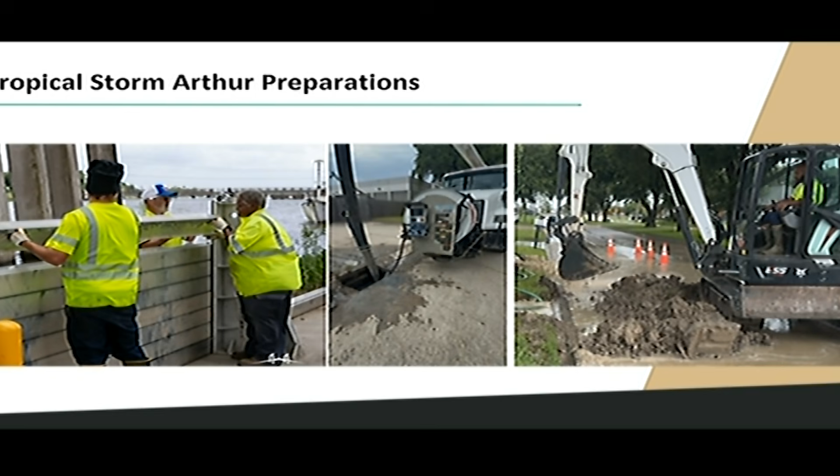Coming into it, National Weather Service estimated that St. Charles Parish would receive about 2 to 3 inches of rain, with a worst case scenario of 6 to 8 inches starting Wednesday through Saturday. Instead, as you all know now, we received that worst case scenario within about 3 hours of the storm.

In addition, we received 8 tornado warnings, issued between 2:30 a.m. and 6 a.m. on the morning of June 18th, along with flash flood and severe thunderstorm warnings. We were thankful there was no damage due to tornadic activity, as seen in other parishes, especially Jefferson and Lafourche. You can see on the screen those are all the warnings that came through.

So when Jason talks about 2025 having 1 tornado warning compared to having 8 of them in about a 3.5 hour period, it was definitely a wild ride that night. I want to commend all of our employees who were out during that time, responding to resident complaints and any issues that came up.

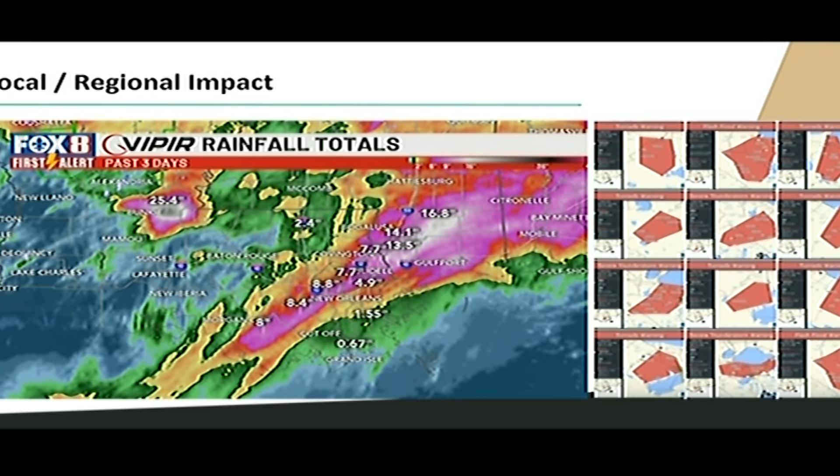All right, next slide. This was a regional storm. You can see some of the regional rainfall rates and pictures from other parishes - Kenner, the airport, Jefferson Parish, and I think one of those might be from St. Tammany as well. There was flooding in Terrebonne and Lafourche Parish as well.

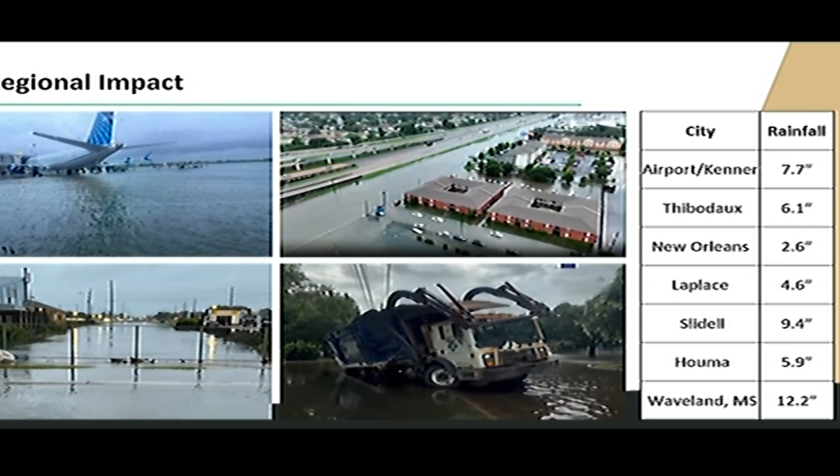Next slide - this is a little more zoomed in on St. Charles Parish, showing our rainfall totals, anywhere from 6 to 9 inches, or close to 9 inches. Some residents within the parish reported as high as 10.5 inches to me. We know there are little pockets inside these rain events where there's more rain, but on average, you can see through that purple streak there, that's the rain we received.

To put that into perspective, that 8+ inches in 3 hours is well beyond the design capabilities of the parish's drainage system, which is a 10-year drainage system. A 3-hour event for a 10-year system would be 4.81 inches, and we received almost double that in some cases.

So the rain was falling at a lot faster rate than the culverts in front of our homes, or the canals or pump stations, could handle, and that did lead to some flooding. We'll go to the next slide.

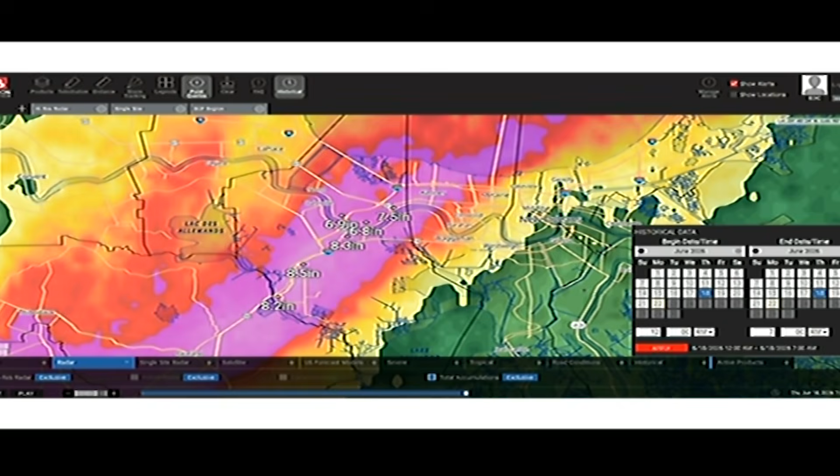This is pump station data showing rainfall totals. As you can see, some of those pump stations aren't registering - we put them all in there, but it looks like we're going to have to go back to some of our pump stations and repair the rain gauges. But you can see there's a lot of consistency. With 56 pump stations, we were starting to run out of colors for color coding. We'll go to the next slide.

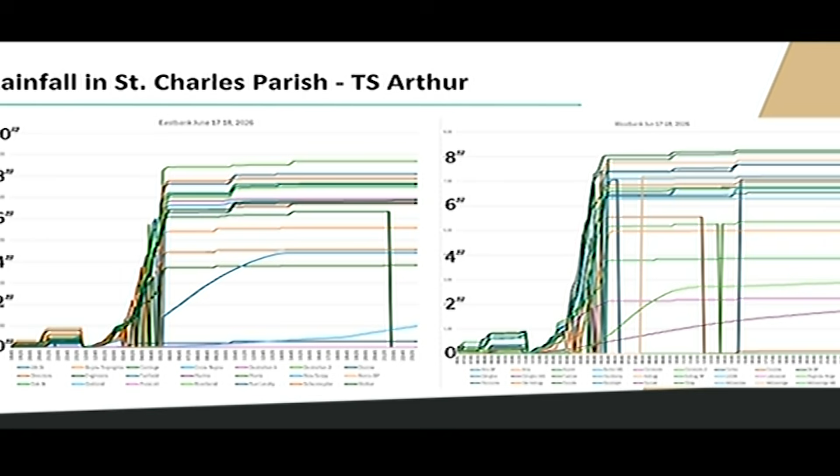This shows the flooding, but I want to go back real quick to show where we are comparing 2025 to 2026. In 2025, from June 1st to July 6th, we saw 3.5 inches of rain. In 2026, in that same time period, 17.3 inches of rain.

Oak Street pump station: 12.8 inches of rain last year, 21 inches this year. Destrehan 2: 11.62 inches last year, 20 inches this year. In some portions of the parish, we were nearing that 100-year rainfall event. That doesn't mean it can only happen once every 100 years - it just means it has a 1% chance of happening in any given year.

106 flooded homes. Again, we have 18,600 structures in the parish. Our goal is to have zero flooded homes. But we did see flooded homes, and a lot of people reach out to me and say they saw water in places, or saw water in their yard when they've never seen it before. I'm going to be right there with you. I saw water in places I've never seen it before either.

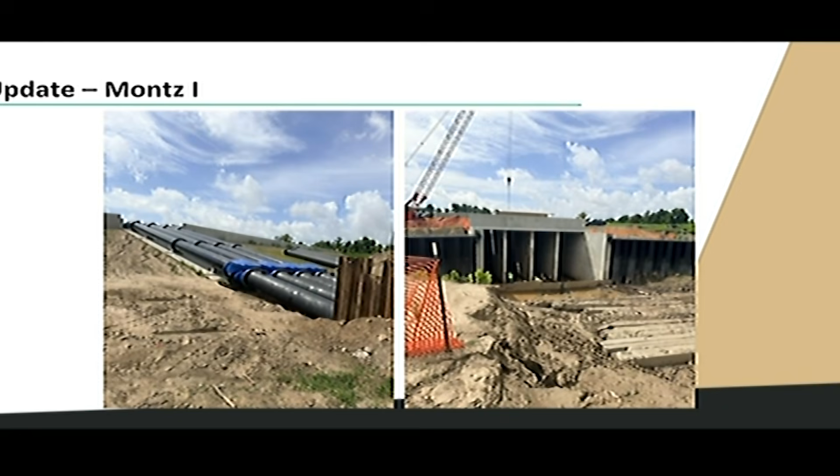We'll go to Montz number 2. At Montz number 2 pumping station, crews have completed the concrete foundation and permanent sheet pile wall. Construction of the levee crown bridge is nearing completion. Work on the piping supports is also progressing. The project is currently estimated to be completed in January of 2027, moved up one month as far as its completion date. I mentioned at one of our previous council meetings that because all of our materials were ordered at the same time, and we have the same contractor building both, that's causing Montz number 2 to catch up to Montz number 1, which we are not complaining about.

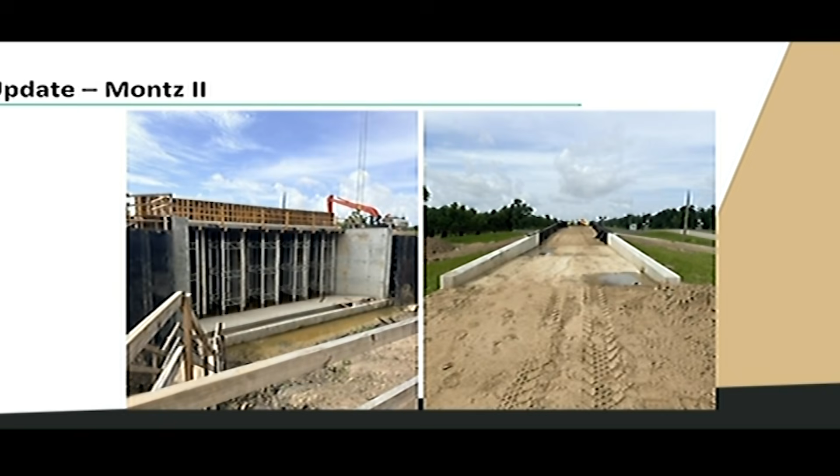Looking at the Ormond CN Jack and Bore project, crews have completed the sheet pile installation for the Site 1 receiving pit and partially completed the Site 2 receiving pit, while continuing work on the Site 2 jacking pit and other site tasks, including maintenance of drainage flow. If the schedule holds, the first bore is expected to begin in the second week of August.

Once boring starts, CN Railroad requires the work to continue nonstop until the receiving pit is reached. Each 54-inch bore is expected to take 24 hours to complete. In short, they'll be working through the night to make sure those get in and get across that railroad track.

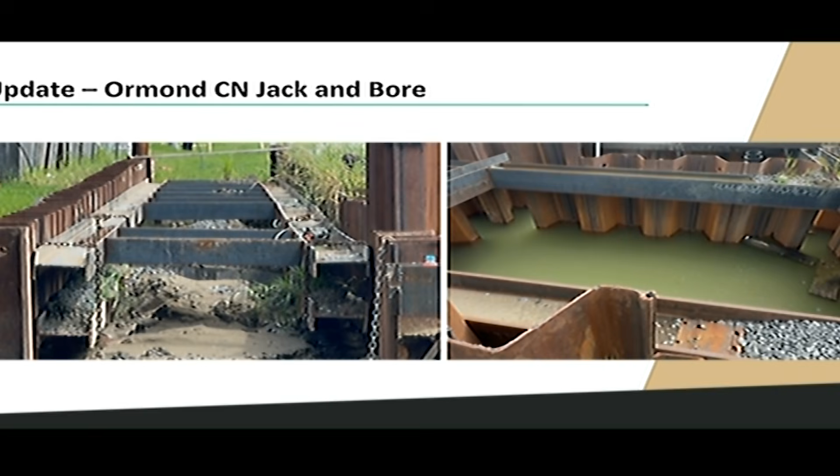Okay, Murray Hill and Destrehan Drive. The contractor is working on adjusting the catch basin tops and pouring concrete curbs. The next step will be the concrete walks and drives, head walls and outfalls, mailboxes, concrete trench drain, asphalt mill and overlay, as well as seeding and fertilizing. The project is intended to be completed by September 1st.

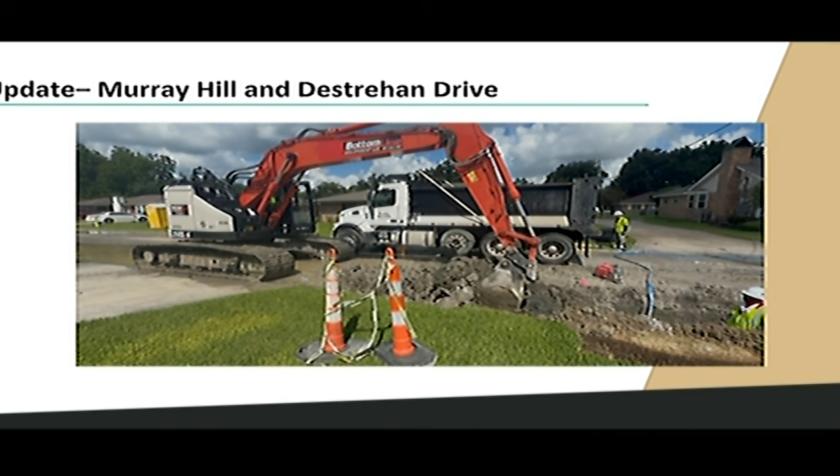We'll go over to Primrose Canal on the West Bank. Work to address the conveyance and stabilize the Primrose Canal is ongoing, but we are currently dealing with a stalled crane issue. The contractor is expected to get that completed before the end of summer, and they've been working to get the crane back up and running. They might have actually gotten that done by now.

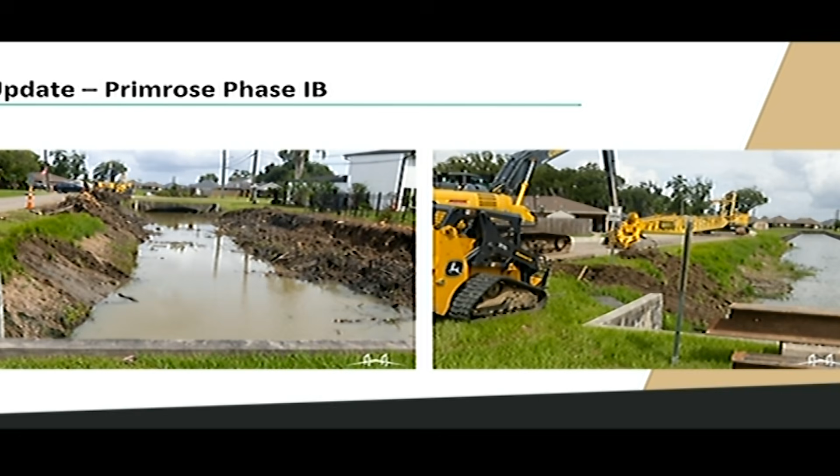At each of those locations was a restriction identified by Bayer when they completed a drainage study. As part of that drainage study, they installed 2 sluice gates that restrict the flow of water into the Sugarhouse Road Canal. Residents have reached out to myself and to Councilwoman Fonseca, who reached out to me, to make sure that sluice gate is closed. We did have an issue with it being open slightly more than it was supposed to be, so we've gone back and corrected that situation and locked it in place.

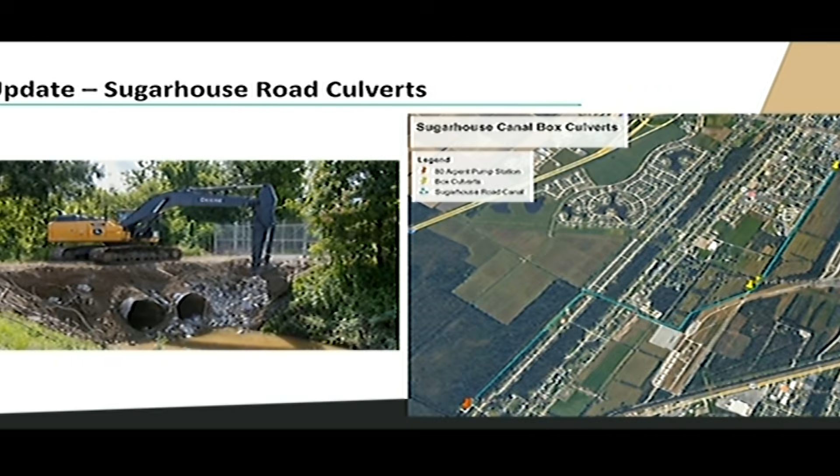So we'll go to the next slide. This is the work - that middle section is one that's been completed, and to the left is one currently under construction. All the way to the right, that's at 4th Street in Sugarhouse, and that one has been completed recently.

So we are debottlenecking, as Walter would say, several spots in that canal, and the goal is to make sure we can keep the Sugarhouse Road Canal within its banks. When it leaves its banks, it runs down Post Street, down Corville, and a few other streets, adding water into that neighborhood, which then has to drain, most of the time, through the Ellington and Milling Street ditch, which is already overburdened.

This council approved a survey, which I think might be completed by now, for us to make an improvement to the outfall leaving the Milling Street ditch, which will give us good information on how to make an improvement and get that water to the 80 Arpent Canal. We're also looking at potentially some retention near St. Anthony Church that could be beneficial to us as well.

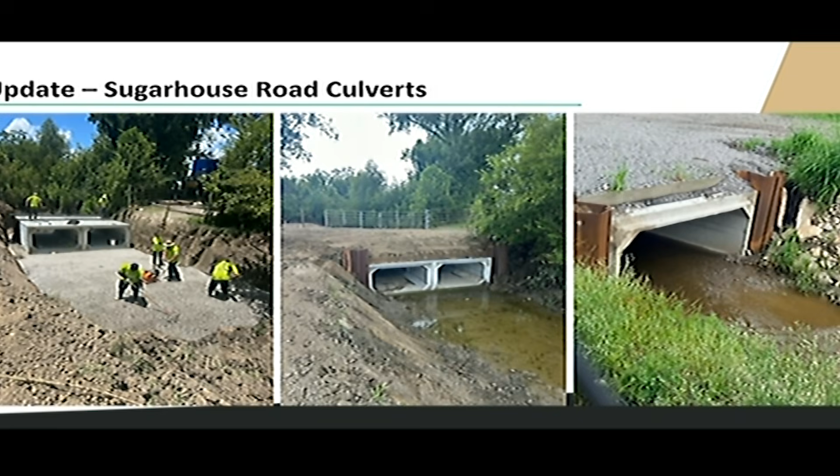All right, let's see - sales tax. Sales taxes were up again in May, just over $280,000 from last May. To date, sales taxes are up 6% higher year over year, or nearly $1.25 million higher for the first 5 months of this year versus 2025.

I also want to mention, since we just got out of June, the parish did submit its audit that you guys will be briefed on later this year. That went out around June 29th, June 30th, Grant. So that is completed as well. That concludes my report.